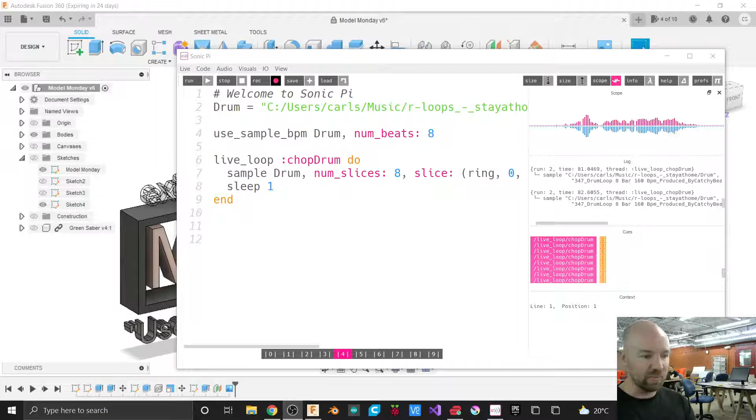Let's go ahead and get started. It is 7 o'clock here at the Milwaukee Makerspace on a Monday, so that means it's time for Model Monday. And we're going to model up a useless box; that's our project for the next couple weeks here.

Let me kind of fade out our Model Monday beat here. Let's kill that down. Alright, cool. So

like I said, useless box is our project for the next couple of weeks. And what does that mean? What is a useless box? Well, a useless box is something like this. I just did a basic Google search for useless box and came up with, basically, it's a box that has a switch on the top. And the entire purpose of the box is to turn itself off.

So as soon as you flip the switch, it turns on and turns the servo, and the servo flips the switch to turn itself off. So that's kind of the entire purpose of a useless box. But for us, it's an excuse to draw some stuff. So let's go ahead and do that.

I'm going to start a new project just by going up to this tab at the top where it says New Design, and I'm going to click on that New Design tab, and we've got a new document going on here. So I've got my part and a caliper, and what we're going to be modeling is a servo. So I'm actually going to come and steal that servo from you, Mike, if you don't mind, and I'll steal my caliper. Beautiful, thank you.

Alright, so the bonus of coming to join us in person for Model Monday is you get to grab the part that we're going to model a little bit early and grab some measurements from it. So I've got this servo here, and I've got my calipers, and I'm going to be shouting out some measurements as we start our sketch, for those of you joining us here, and for those of you joining us at home or via the recording after the fact. So

I'm going to think about this servo as kind of one sketch. I think I'm going to draw this mostly as a single sketch, a top-down view here. So I'm going to draw most of this servo thinking about it from this perspective. And I'll start by starting a new sketch. So I'm going to come up to the Create menu, and I'll choose Create Sketch.

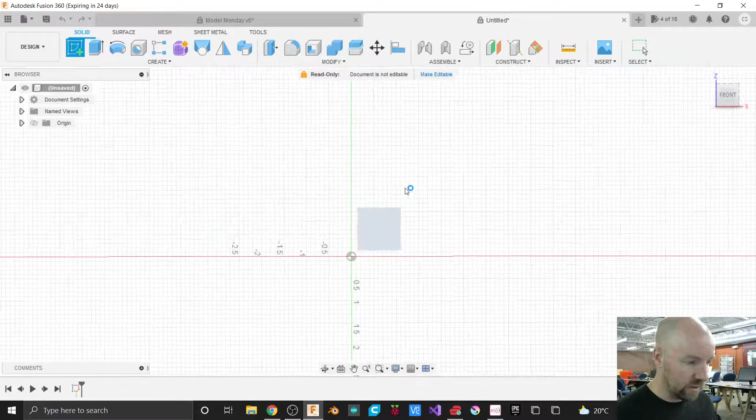And I'm going to create that sketch on my front plane. So I'm going to hover over that little yellow plane, and you can always navigate using the navigation cube so you can see it a little more easily if you're having a hard time selecting the right plane. And I'll click on that, and it'll spin me around to look straight down on it. And now we can start by making a rectangle.

I should mention, in general in this class, and it's probably a good thing to mention every time we start a new project, in the document settings over here in our browser on the left-hand side, we can spin down the document settings option, and you can see that I'm drawing in freedom units. My brain tends to think in freedom units.

If you want to draw in the international standard that's accepted by pretty much the rest of the world, feel free to do so. I support that decision. However, I'm going to draw in inches. You'll have to do that conversion in your brain hole. And if you're drawing in millimeters, you're smart enough to make that conversion on your own.

I'm certain of it. So I'm going to come up to the Create menu and come down to Rectangle. And I'm going to choose to make a 2-point rectangle, I think. I'm just looking at my part and seeing if there's a reason to make anything other than a 2-point rectangle. And I'm going to say no. So I'm going to grab my 2-point rectangle tool.

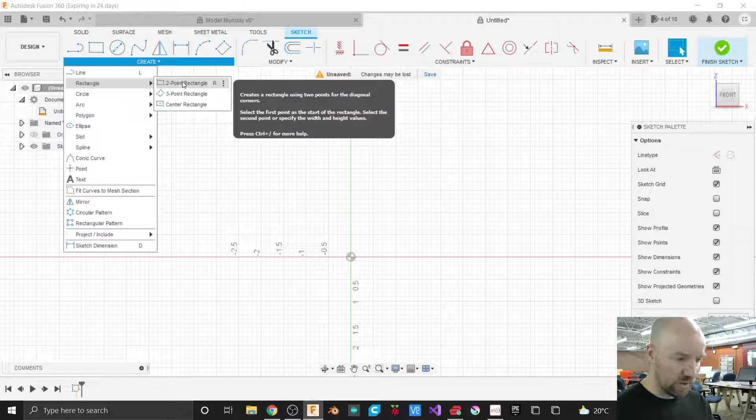And I'll click to place the beginning of my 2-point rectangle right there at the origin. And then I'm just going to move my mouse out. So it's a click and move, not a click and drag. I'm not holding my mouse button down while I do that.

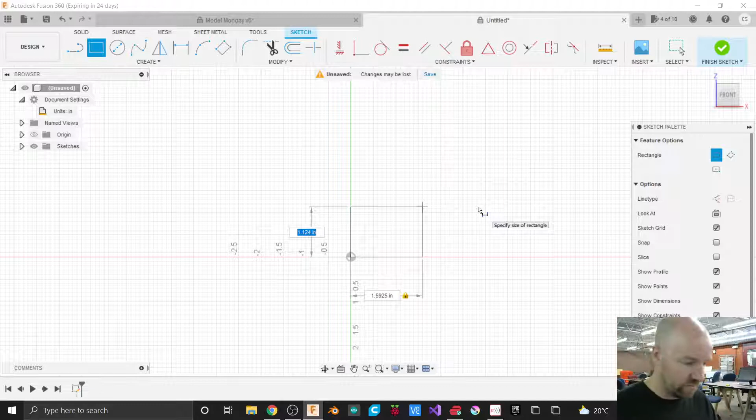And we are going to make this rectangle exactly 1.5925 inches. And then if I hit the tab key, the other measurement here, and I'm just kind of measuring up my servo here, it's 0.7835. So 0.7835. And I'll just kind of leave those measurements up there for a little bit, and I'll kind of zoom in here. I'll do this periodically throughout class today, I'll make a measurement, because we're going to be doing a fair amount of sketching, and I want to make sure you guys catch all these numbers.

So something you'll notice is we've got some rounding going on here. I feel like there's a way to change this. I think is it in properties? I feel like there's a way to change the default setting for decimals. And maybe that's not really important for this class, but now I'm just kind of curious. In our design, we're actually in our... There's not. There probably is a way to change that. I just don't know it right now, so we're going to move on.

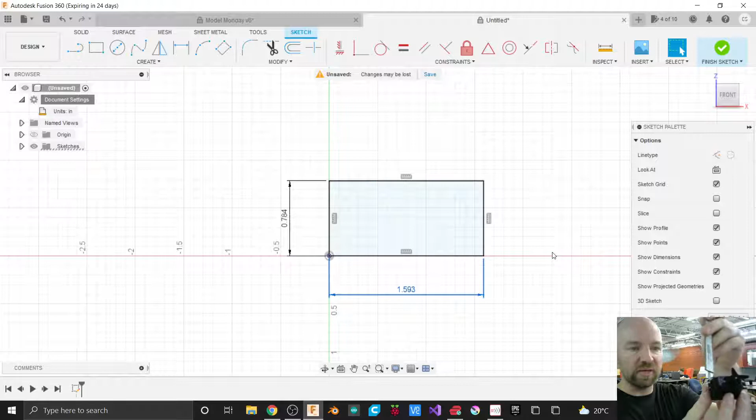Alright, so the next thing I'm going to think about drawing or modeling on this servo part here is there are wings, our mounting points here. Our mounting points are actually a different width than our servo body, and we can draw that on here. So I'm going to go ahead and grab my 2-point rectangle tool again. So I'm going to say create rectangle and then 2-point rectangle.

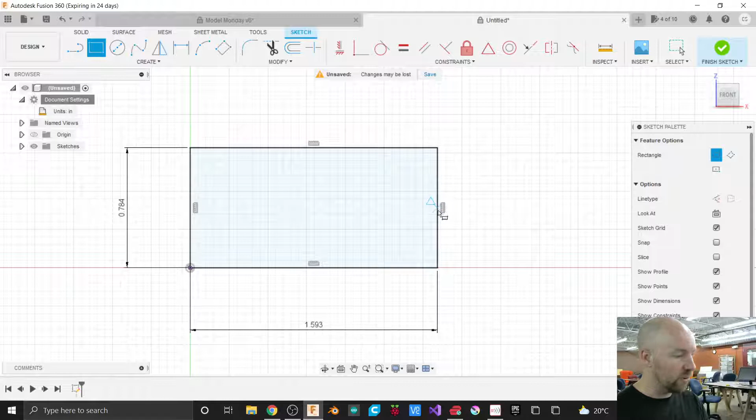For those of you trying to impress your friends at home with your keyboard shortcut skills, you can use the R key. Now, you notice if I hover over the middle of this line, I get that little blue triangle. And that blue triangle is telling me that I'm snapping to the midpoint of that line. And that is indeed what I want to do here. So I'm going to snap to the midpoint of this line, and then I'm going to move my mouse out here, and it's going to come out to a depth of, I can do it like this, and grab this measurement here of 0.265. That's going to be inches.

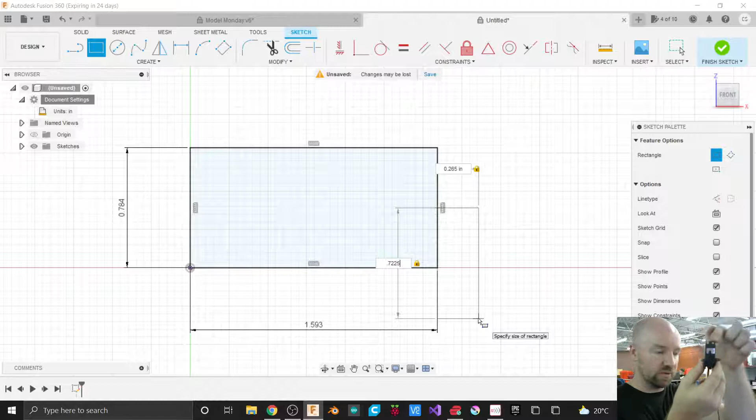And if I hit the tab key, now I'm only drawing from the midpoint out here because I know that this little thing is centered on my servo here. So I'm going to measure the width of the whole thing here, which is 0.7225. And then I'm going to do some math right here. So I measured this as being the entire width of this mounting point, but I'm actually just going to say divided by 2, and that's going to give me half of that because I'm drawing out from my center point out here.

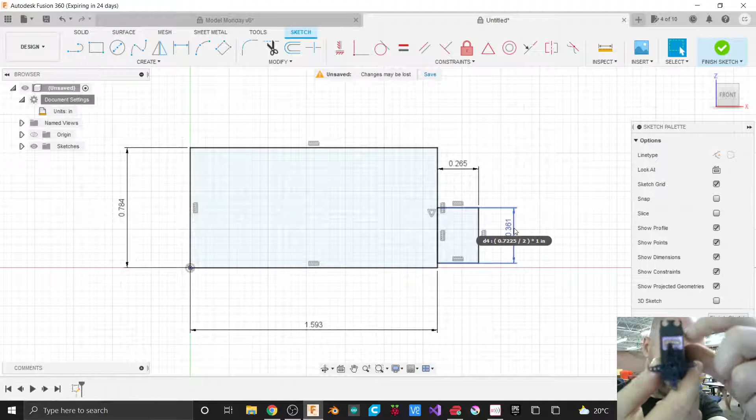That saves me from having to measure whatever this tiny amount of space is off here to the side. It's kind of difficult to see, but you can see the mount is not the full width of the servo. So that saved me from having to do that. And now, in order to get the other side of this, actually before I do that, let's go ahead and draw our circle in the middle of this thing.

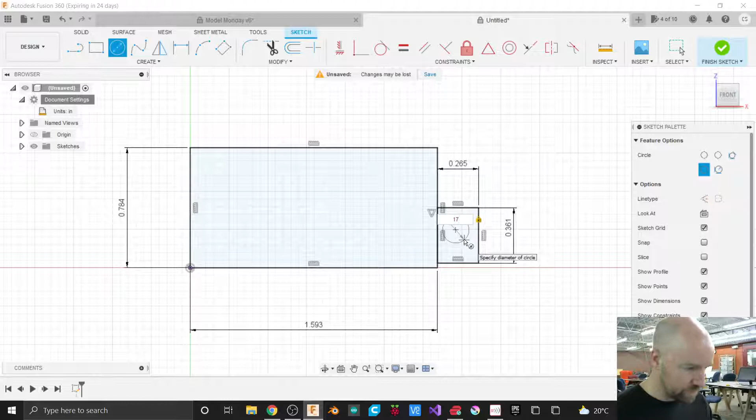So we are going to draw a circle here. So I'm going to grab my create menu and circle, and then I'm going to choose to make a center diameter circle. Now I'm not really placing this at any particular location right now. I'm just placing it in roughly the spot that I want to put it, and then we'll negotiate it into place after we have it drawn. Now the diameter of this circle is going to be 0.17 inches. And I'm going to go ahead and hit enter here.

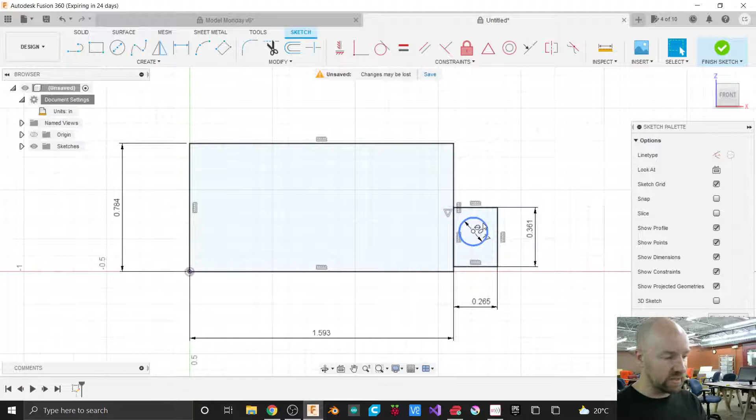And now I'm going to move it into place. So something you'll notice about my sketch so far is most of the sketch lines I have here are black. And that is because those sketch lines are fully constrained. So they're locked in position and in dimension. They're not going to move because they're locked in position with my origin, and they all have dimensions. Now this circle that we just placed is blue, and that's because the circle is not fully constrained. It's locked in dimension, here's my dimension of that circle right there, but it's not locked in position.

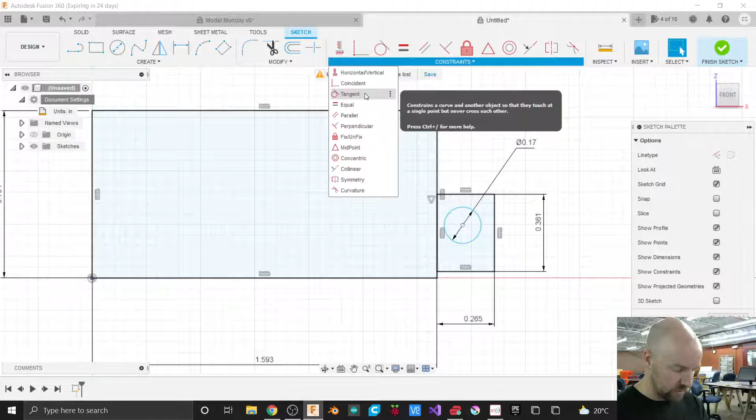And we're going to lock that in position now. So I'm going to grab from my constraints menu this tangent constraint. And I'm going to say, make this circle tangent to that line. And it's going to go ahead and lock it in position left and right.

So now this circle will always be tangent to this line here. And now I'm also going to give it a dimension from this other line here. So as you may know, in addition to giving dimensions to the sketches that we make, we can kind of add dimensions to relate objects to each other, if that makes sense.

So in my Create menu, I'm going to go ahead and scroll all the way to the bottom and choose this Sketch Dimension option. So I'll choose Create and then Sketch Dimension. And now I'm going to dimension the center of this circle and this line down here at the bottom, the edge of my mount for this servo here. And now I'm going to move this measurement out and just place it.

So now you can see our circle is now changed to black, so it's fully constrained now, only it's constrained to the wrong dimension. So we need to fix that. So if I measure, let's go ahead and zero this out again. If I measure the gap between my circle and my edge, it's 0.0835.

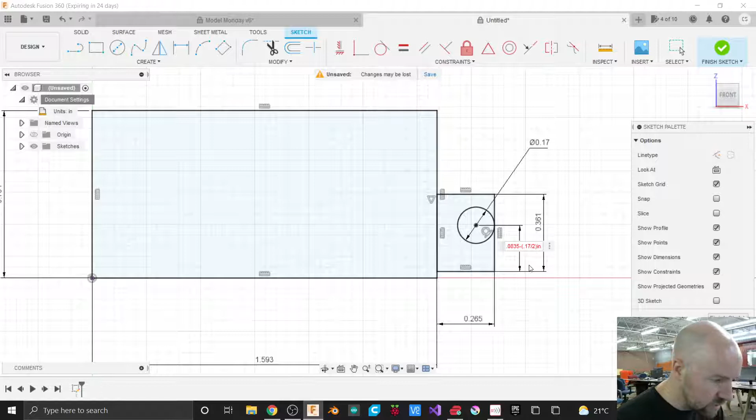And you can see I put that, oh, it doesn't like what I just typed there. Doesn't like that at all. Why won't it let me do that? Do I have to type in inches here? Alright, what is the part that it does not like? It likes that. Can I do minus 0.17? Nope. Can't subtract, apparently. I can add. Nope, can't add either. Why can't I add if I put a 0 before that? Well, it was letting me do math before. Why won't it let me do math now?

It's always fun when you can't do things that you feel like you should be doing.

Oh, okay, so minus 0. Well, I'm just going to go ahead and do that radius right now. 0.17 divided by 2. I don't have my phone on me. Does anybody have a calculator handy? What's the number? 0.17. 0.17 over 2? Yeah. 0.085. It really doesn't like to do that.

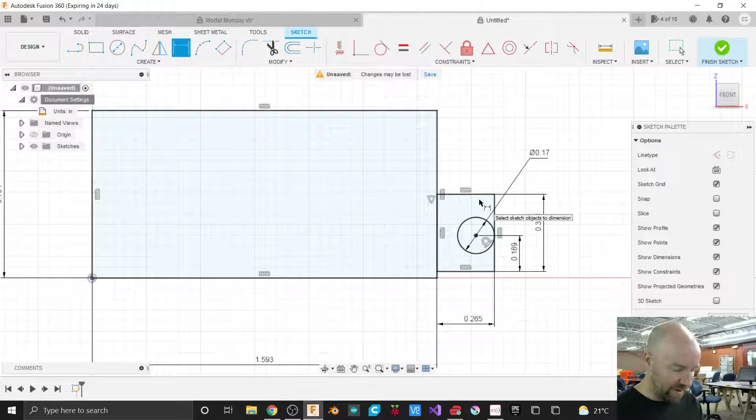And now the last thing we need to do here is to create the rest of our mounting holes. So we're going to have the same pattern over on this side, and we're going to have the same pattern over on this side, and we can do that by using the mirror command. So I don't need to redraw this whole bit of stuff here. We can use the mirror command in order to create all the rest of our shapes.

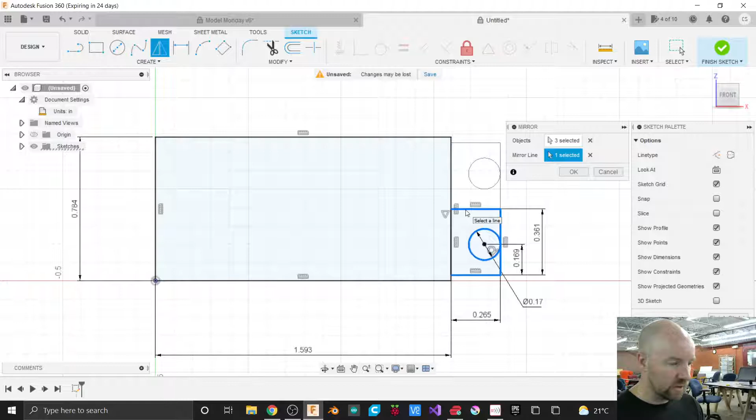So if I go ahead and click on create and then come down to mirror, now I can specify each one of the lines that I'm going to mirror. So I just need the circle and these two outer lines here that are part of our mount. And then the line that we're going to mirror this off of is this line right here, this other edge of our rectangle. And you can see it kind of ghosted in place there. And I can say OK.

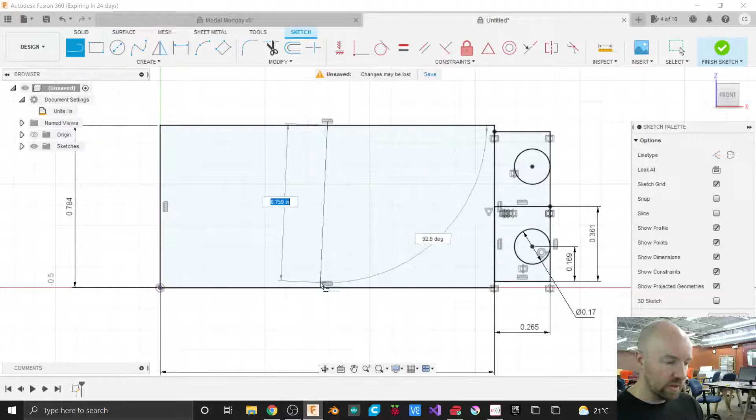Now I'm going to do the exact same thing, except I'm going to mirror all these things over to the other side. But if I'm going to do that, I need a center line to mirror across. And I can do that with our line tool using that midpoint option. So if I move towards the midpoint of this line with my cursor, you can see that little blue triangle pops up, and I'll just do the same thing over on this other side, and now we've got a line that divides our piece right in half here.

And I'm going to do one additional thing. So I can take this line, and notice if I hover over this part of my rectangle, it selects differently from this other part. So this is divided into two individual rectangles right now. But I don't want that to happen, because it's going to make me extra work later when I go to extrude this, so I can change the line type from this solid line. Over in my sketch palette, I can click on this construction line option here. And now this is just one solid shape with a construction line dividing it.

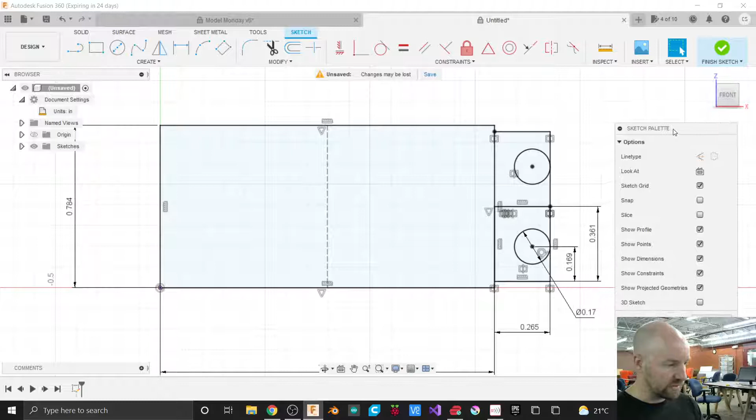Alright, so we can do that same method that we did just before. We can click on create and then come down to mirror.

Now I have a whole bunch of objects that I want to mirror. Actually, not really a whole bunch. I got several objects that I want to mirror. And there are a couple of ways to select objects in Fusion. So I can go through and click on these individually and go through and select all those options. Or there are select tools. So I've got my window selection checked here in my select menu up at the top. This is kind of my preferred method of selection.

And in order to select all of the sketch items that I wanted to select here, there are two ways that I can use this tool. So I can click and drag from top left to bottom right. And now you can see that my selection box is a blue line with an orange filling. And the way that that tool works is only the items that are fully inside of that selection box will be selected. So this line was not fully inside of that selection box. This line was not fully inside, neither were these circles here. So the only thing it picked were these lines up here.

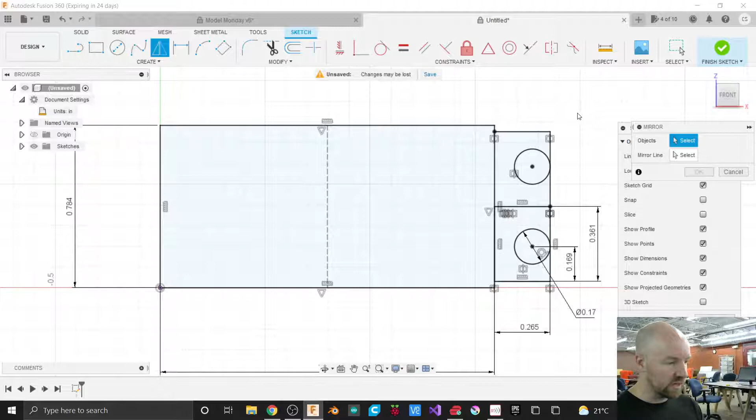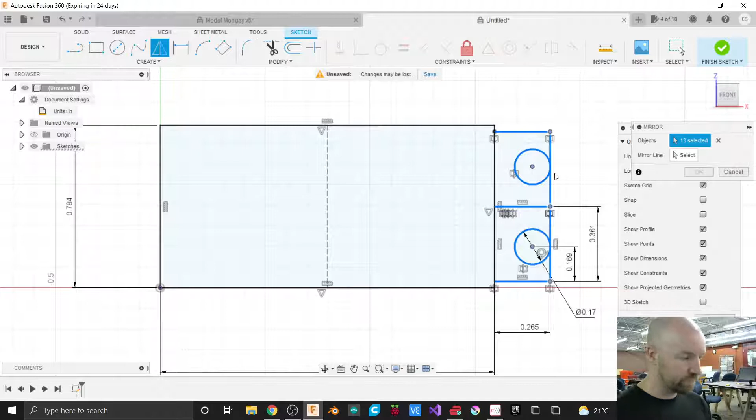If I use the tool the opposite way, if I click from top right and go to bottom left, you can see I got a yellow selection tool. And this yellow selection tool will select anything that it touches. So regardless if it's fully enclosed by my selection, if it's touched at all by my selection, it'll get selected. And that's a good method for me right here. I'm going to go ahead and choose my mirror line and say OK.

Alright, so now we're going to do a couple more things on this sketch. So I'd like to sketch the shaft of my servo on this sketch here. And we're going to locate the shaft of our servo very similarly to how we located our circles over here, our kind of mounting hole circles. So I'm going to come up to my Create menu, and I'm going to come down to Circle, and then Center Diameter Circle.

You know, before I do this, let me just kind of do a check-in. How are you guys doing? Are you with me? Are you following if you're choosing to follow? Do you want me to pause and see how you're doing? Or just take a little brief pause for the cause here and you can catch up? Dan, how you doing? I am going to do it by the YouTube video later because I got locked out of my Fusion account. Cool. Right on, alright. So we're just taking a little brief pause as we get a few people to catch up in class. I tend to go real fast. So there's another benefit of coming to class in person: if you need a little bit extra time, I will 100% give that to you. Or like Dan's going to do, he's just going to pause the video every 5 minutes. There you go. All right.

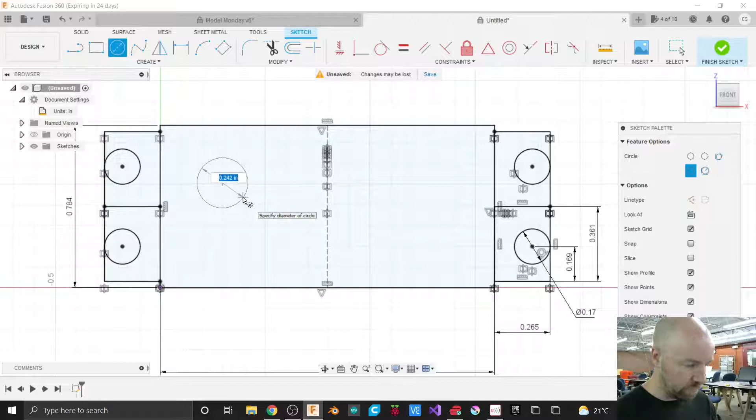While you're catching up, I'm going to measure this servo here. All right. You good? Goodish? Okay. So the shaft of this servo is 0.23. Yeah, 0.23. All right, so I'm going to go ahead and grab my circle tool. I'm purposefully making this in the definitely wrong position, because like I said, we're going to use constraints to force it into position. So I'm going to place this kind of off to the side here. I'm going to add my dimension that's 0.23 inches, and I'm going to click enter.

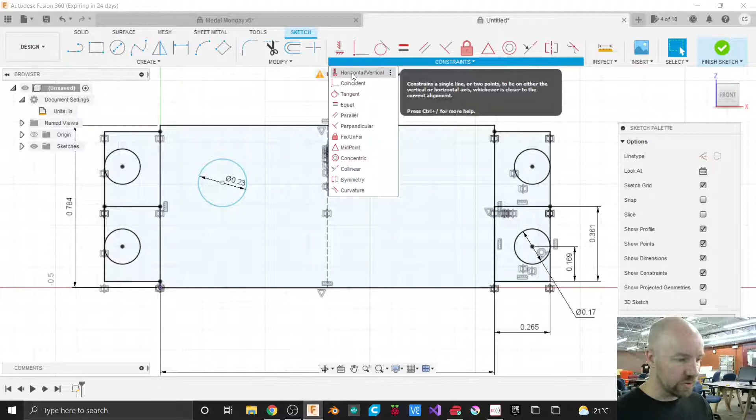Now the circle is definitely centered right to left on our drawing here. So I can constrain this right to left in our drawing using some existing lines that we have here. So there is a constraint called the horizontal vertical constraint. This is kind of a new thing that I'm doing, using these constraints more often, and this horizontal vertical constraint is nice. So what it says is if I choose the center of my circle and then I choose any one of these points here that is the end point of that center line that I drew initially that was part of this mounting bracket, so I can click on this point over here or one of these points over here, what will happen is this circle will always say, hey, I'm straight horizontal from that point.

So if I grab my move tool, I can only move it right or left, even though I'm moving this up and down, because it's got a constraint forcing it to be directly horizontal from this point. So now it's constrained in one direction.

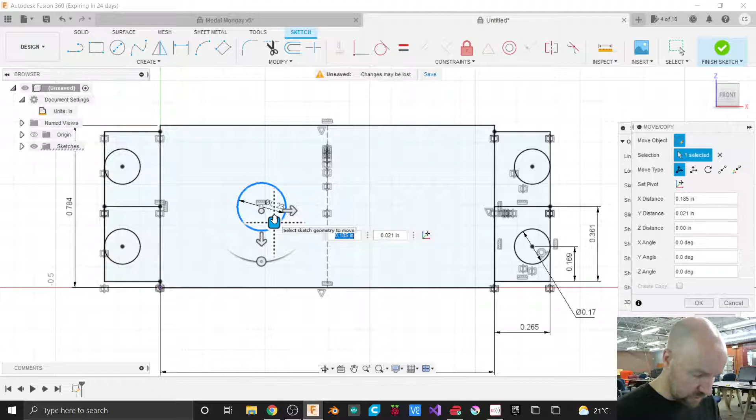Now I just need to constrain it in the other direction, and I'm going to do that in a little bit because we've got a couple other concentric circles that we're going to draw around this, and it looks like the final concentric circle is tangent to this line up here.

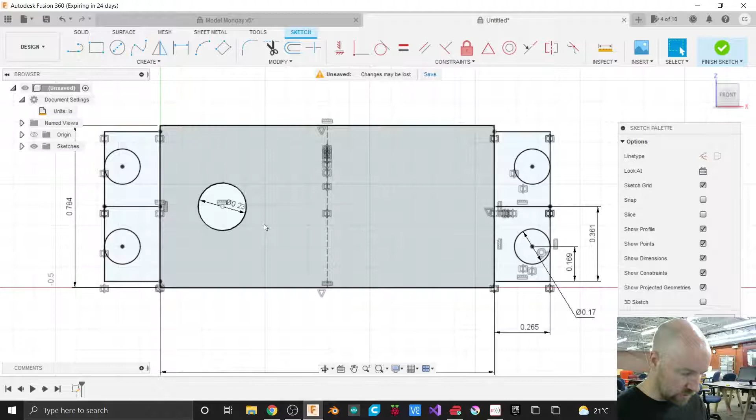So I'm going to wait to constrain that until I have my other circles drawn. Alright, so now I'm going to draw my 3 other circles. I'll draw one circle that is 0.4225, so I'll grab my circle tool. 0.4225.

Now I will say that this is way overkill for what you need to make it. If you're going to model this servo, the amount of detail you need to have in order to create something functional, or that is accurate enough that you could put it in a drawing or an assembly and be able to pull useful information from it, is less than what we'll have going on here. But it's fun to try to make things as super accurate as possible.

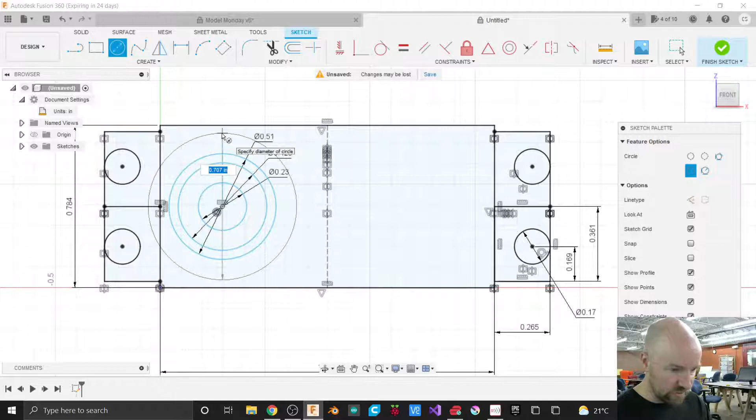So that's kind of the method that we're using here. So this final circle is going to be 0.78. I feel like this was 0.7825.

Alright, so I'm going to take a little pause here because I drew a lot of circles, and each one of them has a measurement that I've kind of got concentrically pulled out around the outside here. So we've got 4 total circles and a center shaft circle. I've kind of got them arrayed here. This is really useful to be able to reposition these measurements wherever you need them, so they can make you have a nice clean looking drawing.

So I'll just take some time to clean up my drawing and really make it easy to read here. That's always important. Somebody once told me that when you have a drawing like this, you're supposed to have all the measurements only on 2 sides. I don't know if anybody else prescribes to that suggestion. I'm not following it here, but if you feel there's a reason to do that, go ahead and yell at me in the comments.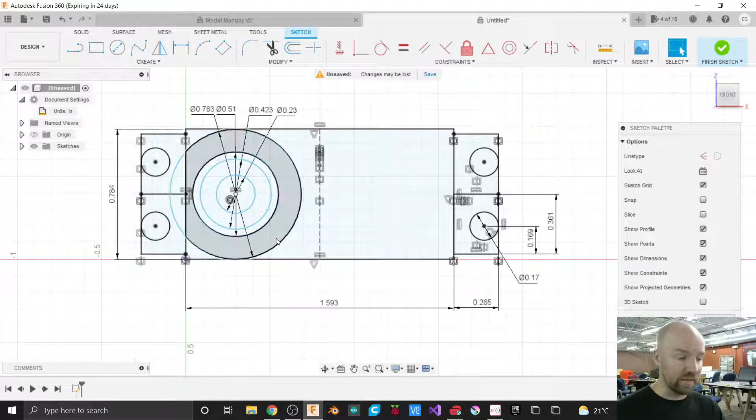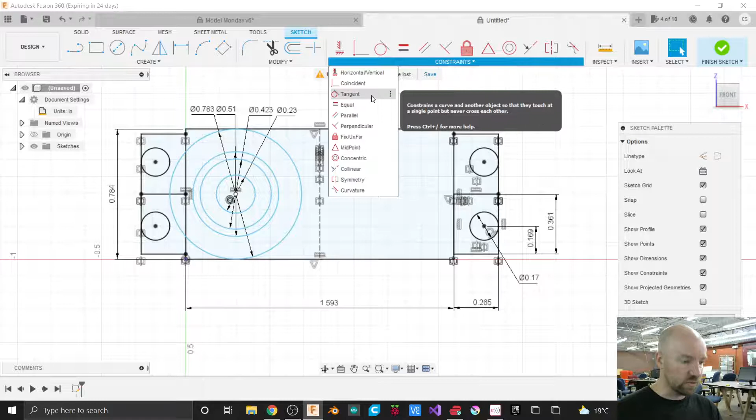Alright, so now we've got a whole bunch of circles drawn here, and now we're finally going to place these in position. So we've got them constrained in this Z direction, in the up and down direction. Now we're going to constrain them in the final direction, because this circle is going to be tangent to this line here. So if I grab my tangent constraint from the constraints menu, and I choose this outer circle, and then I choose our line, now it's going to move them all into position.

Because all of these circles share a center point constraint. They all have that because I chose to make the start of my circle at the center of the last one. They're all kind of holding on to each other in that way. Now the last thing we want to do is create the last little bit of this shape here. This is 0.7 even.

So I'm going to grab my rectangle tool one more time, and I'm going to place the first point of my 2-point rectangle at the center point of all those circles, and make this out in this direction. It is going to be 0.93 by 0.7 divided by 2, because I'm choosing to do this halfway again, since I'm going to mirror this over the other side.

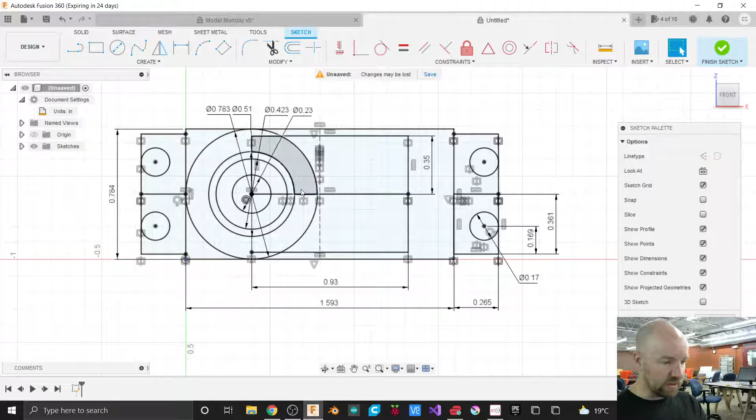Alright, so I'm going to do a couple of things here that I don't do all the time, and I'll explain why after I do them. I've got a lot of lines that are kind of overlapping here, and I don't really want that, so I'm going to use the trim tool.

The trim tool is in the modify section, so if I click on modify and come down to trim, this tool will allow us to cut off the edges of the parts of the line that we don't need. This last concentric circle and this rectangle are kind of all part of the same shape, so I can use the trim tool to cut away the parts of this line, this circle, that I don't need. The trim tool works by looking for intersecting lines and cutting away the bits in between them.

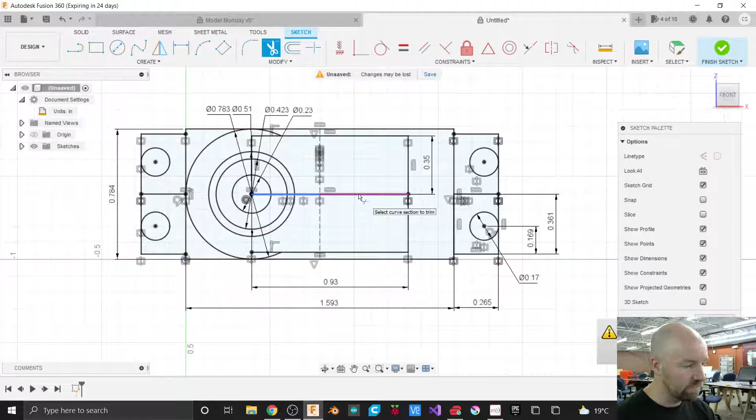So I can click on that part of the circle there and cut it away, and that part too. I can do that with this center line here, although I don't know how that'll affect me later, so I'm trimming away all of the individual parts of that center line to get rid of them. I'm also going to trim away these parts of the line or rectangle that extend beyond the circle here - that line, and that line, and that line, and that line, and that line.

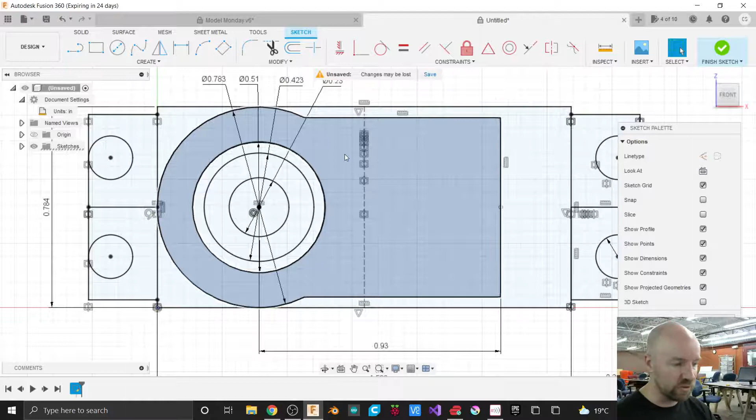Now the reason I've done this is all of this I'm going to extrude as one piece, and it just makes it easier for me to select one object to extrude, or one enclosed area, than it is to extrude out and click on all the little individual pieces. The other reason is it just looks cleaner, right?

Now Fusion is currently swearing at me - all those lines are red. The reason they're red is because I deleted a lot of valuable geometry, frankly. I deleted this center line here, and that center line was my mirror line, so the method by which this line and this line appear over on this side no longer exists. You can also see I lost my dimensions because I cut away that center line there. So if I want to change dimensions here on this object, it will not behave in predictable ways when I go and change those dimensions.

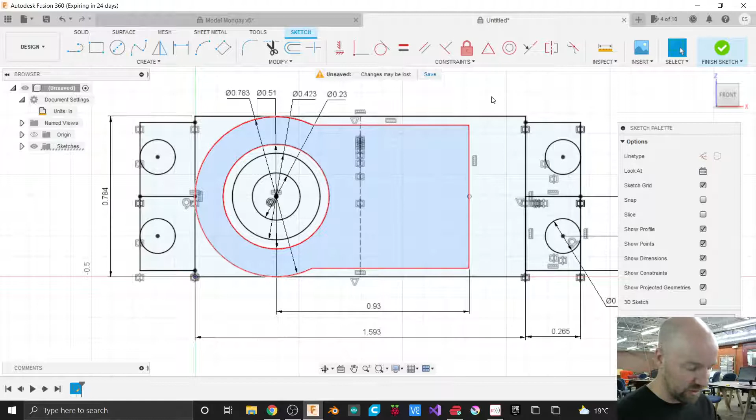So I don't often advocate the use of the trim tool for things that you're going to need to change, or may need to change, but these measurements are pretty much set in stone. We've got our part right here, and I'm confident that I measured it properly, so we're just going to roll with it, and I get to show you how to use a tool that we don't use a whole lot.

Alright, now that is pretty much it for this sketch. I'm just kind of looking at my part, and almost everything is modeled, or almost everything is drawn, on this single sketch, which is convenient for us. So I'm going to go ahead and click on Finish Sketch here.

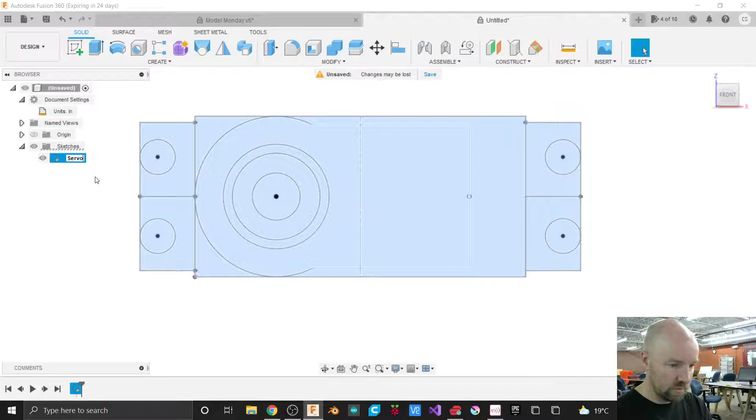Now I've got a Sketches folder over here in my browser, and I can go ahead and name this. This is my servo - servo with an R. Actually, I could go ahead and call it servo body. It's not really a body though, so bodies are a whole different thing. I'm just going to call it servo.

Alright, now we can start extruding the parts of our servo here. We've got everything drawn in one sketch, so we're going to need to make use of an offset tool as we extrude. Maybe we won't actually. Alright, so I'm going to start by extruding kind of the main body of our servo. I'm going to spin this a little bit more into a three-dimensional view.

How you doing, Mike? Do you have a sketch? Yes. Sweet.

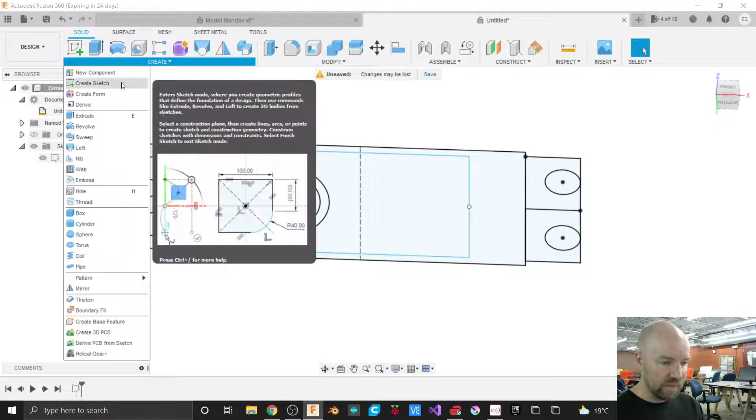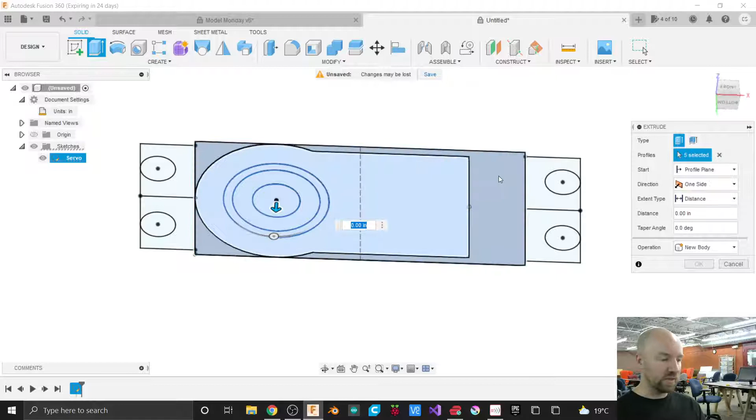Alright, so I'm going to go ahead and click on Create, and then I'll choose Extrude here. I'm going to extrude all of the parts of this servo that are inside of my main body here. So everything inside of this big rectangle that we drew when we first started, that's all going to get extruded.

And it's going to get extruded a distance of 1.44. So I'm going to go downwards here, kind of away from my sketch. I guess this is technically backwards because I drew on the front, so I'm moving towards the back.

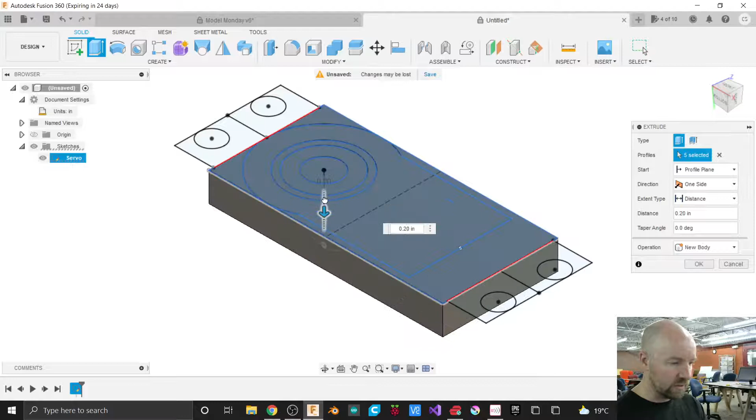I can see that it's a positive number when I'm moving in that direction, and if I move in this direction, it's a negative number. I'm going to extrude some things in that other direction, so I want to make sure I type in the right positive negative value here. This is going to be 1.44, and for me it's a positive number, but for you it might be different. Fusion is a mystery to me about negative and positive numbers. Sometimes I think it should obviously be negative, like here I'm going towards the back, so I don't know why that should be a positive number, but it is. So positive 1.44, I'm going to click Enter.

Now we've got a bodies folder here, and this bodies folder has a body in it. I'm going to go ahead and name that body my servo body. And now I can keep extruding things.

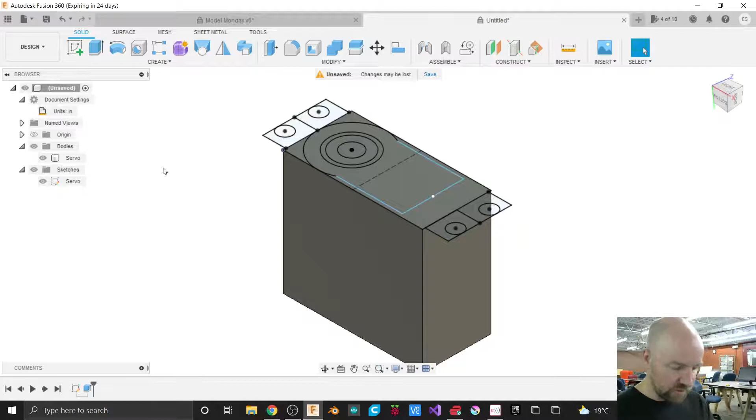So from my servo, I'm going to extrude the outermost ring of our shape here. This shape right here is going to be extruded up and away from the body of our servo.

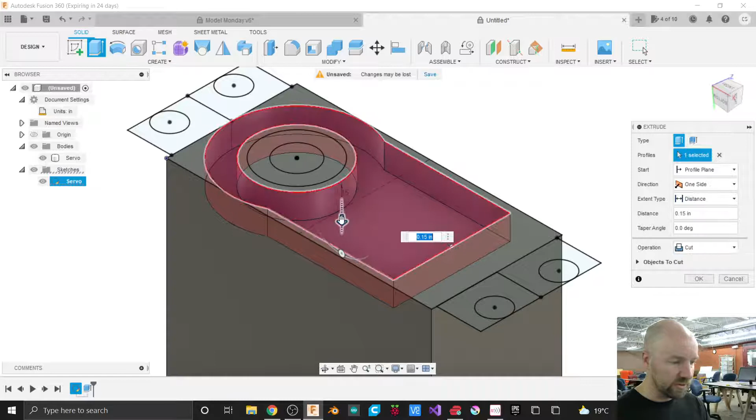0.095, no, 0.1. And now this is going to be a negative number, so it's negative 0.1. We'll bring it up, and that creates the first little step up in our servo here. Now the operation I'm choosing is indeed going to be join. You can see that if we move it down, the operation defaults to cut, and that would be cutting away from this shape. So it's interesting to know that you can cut away from a three-dimensional shape using a sketch. But join is what I want here, so I'll choose OK.

Now I'm going to extrude the next segment of our servo, of our little concentric rings there. So I'm going to click on my extrude command, and then the next full circle there is going to come up a distance of - just going to eyeball that because we got to get close-ish for government work. It is 0.1155, and again for some reason for me this is a negative number. And I'm going to say OK.

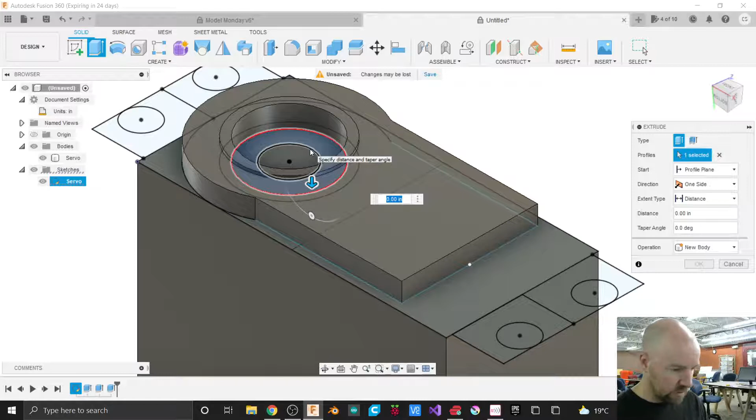Now lastly - actually not lastly - I'm going to extrude the next little segment of our circle, which is going to be 0.13, negative 0.13. And this is also going to be a join, so we're joining those together, and I'll say OK.

Now we need to extrude the shaft. Shaft!

Gotta have that theme song play. When my dad's not in class, I don't have him to sing the song for me, or say things like, 'You damn right.'

Alright, so the last extrusion is going to be the very inner circle there, and this is our shaft. So our shaft is 0.31, negative 0.31 for me.

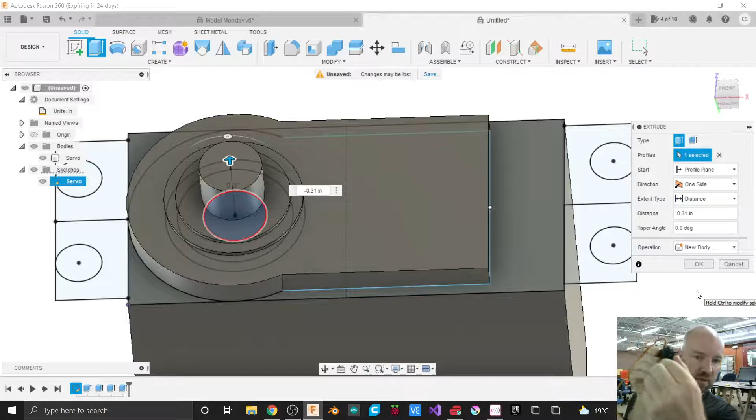I'm actually going to choose to make this a new body. Eventually, I think I'm going to make a joint out of this, and if I want to make this spin in the model, make a joint in the model where it can spin like my servo can spin here. So I need to make it a new body in order to do that. I'm going to choose this new body command and say OK. And then that means I'll have one more additional body over here that I can call servo shaft.

Now the last items that we need to extrude from our servo sketch here are our mounting holes. And we can extrude those from this sketch, even though the plate for our mounting holes starts kind of below our sketch level. So you can imagine like this top surface here, that's where our sketch exists. But we're going to extrude down here by using an offset.

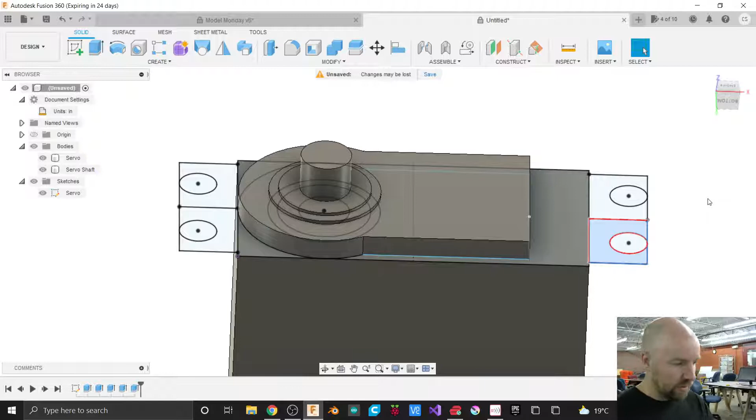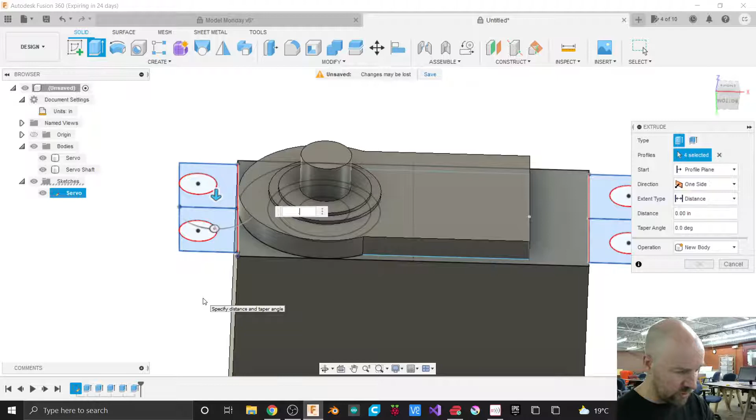So if I go ahead and choose my extrude tool, and then I pick each one of these little mounting brackets here, now the thickness of this mounting bracket is 0.0955, which is going to be positive for me, 0.0955. Yep, so downward into my shape is where I want to go with that.

Now the mounting bracket is not right at the top surface of our servo here, so it's not right up at this level. It's down here, an offset amount - down there a distance of 0.229 - and we can extrude from that distance by changing the start plane here. So normally when we extrude something, it's from the surface that it's drawn on. Our sketch is drawn on a particular surface here in space, and we extrude from that. But right now, what we really want to do is extrude from an offset amount from our drawing surface.

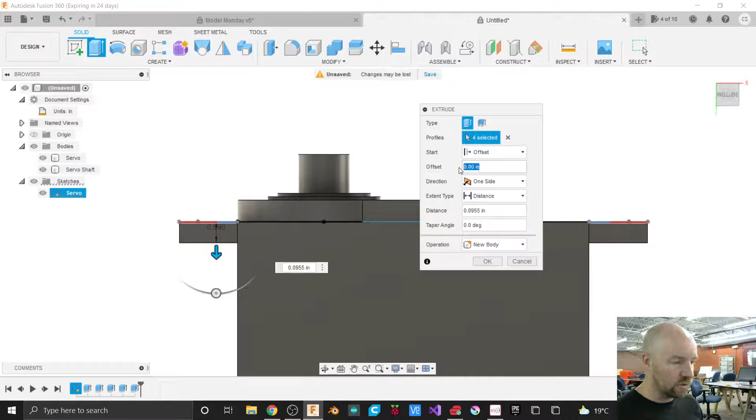So if I make that offset amount 0.229, and for me, again, this is going to be a positive number. For you, it might be different. It could be a negative number depending on how Fusion is orienting your drawing. So just for example, if I change this to a negative number, you can see that it's clearly kind of in the wrong position here.

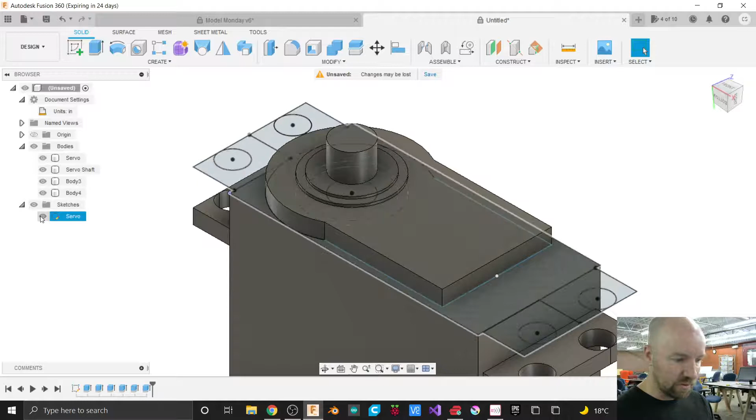So that's your clue that you need to multiply by -1, or just change your negative to a positive. Change those negatives to positives and turn that frown upside down, and then you'll be having a good drawing, and you can hide your servo sketch, and there is the beginnings of a pretty sweet looking servo, if I do say so myself.

Now the last thing I want to do here is to model the port where our servo cord comes out here. So we've got to have room for this in whatever enclosure we build around our servo. You want to make sure you account for this little dangler there. And I'm going to do that on the top side of our servo. So I'm going to spin around to this side here.

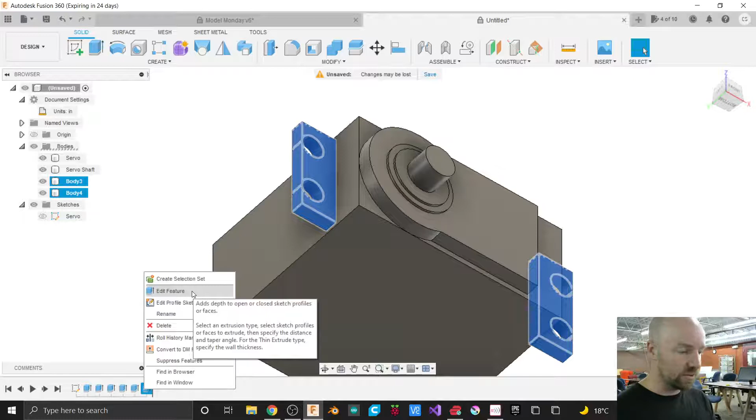Oh, you know what? This extrude, I can see I've got some extra bodies over here. And I don't want that, because it changed from join to new body accidentally. So if this ever happens to you, down here in our timeline, we can right click and say edit feature. It's interesting that it doesn't have that one selected.

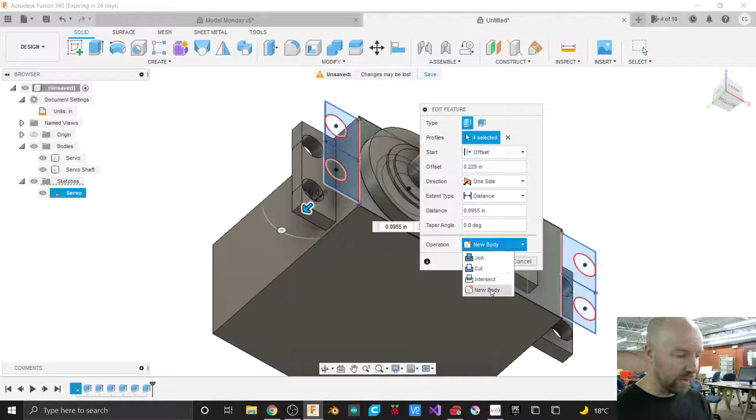Alright, so now instead of new body for an operation, I'm going to go ahead and say join, because I want this all to be one big, happy, joined together family. Alright, so there's our servo body, and like I said, we're just going to draw this little port up here where our cord comes out, just so we have that located for our drawing.

So I'm going to grab my Create Sketch tool here, so I'll click on this Create Sketch icon in my Create menu, and then instead of specifying one of these 3 drawing surfaces, you can draw on any flat surface. So this surface here, which is the shaft side top of our servo, I'm going to call that, is where I'm going to draw this little port. So I click on that.

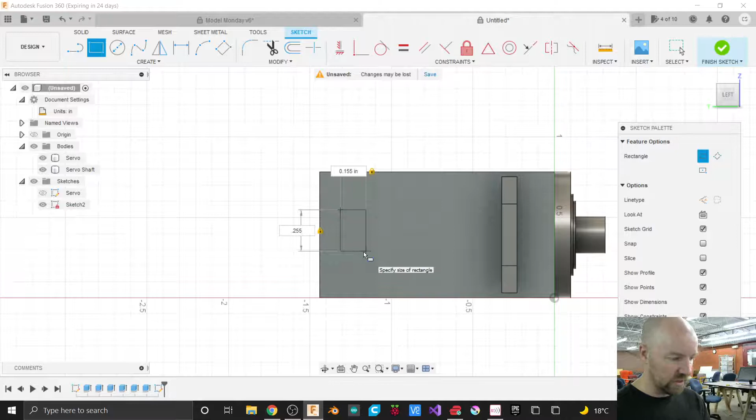Now we're going to draw a rectangle. So if I click on Create, and then Rectangle, and then 2-point rectangle, our rectangle is going to be 0.155 by 0.255. So 0.155, and then I'll hit the tab key. 0.255 is the dimensions of our rectangle. And we just need to place that in space here.

So again, it looks to me like it's centered on our object here. Only I believe that we don't really have a midpoint on either one of these to choose. So I'd like to use that same horizontal vertical constraint that I used before, right? The same way I marked the center for placing this circle here, I'd like to use that same method on the side, but I don't really have a midpoint or a point to click on. We really need to have points here. So we can add them.

In the Create menu, there is a very underutilized option here in the drawings that just says point. So instead of a line or an arc or a circle or whatever, we're just going to make a single point. And if I place that single point on the midpoint of this line, you can see I've got a blue triangle that says I'm snapping to the midpoint of this line. And I can place that point right there.

And I can do that same thing over on the edge of my other surface here. I've got that little blue triangle, so I'm snapping to that midpoint, and I can click and place that point. So now I've got 2 points that are constrained on their individual rectangles.

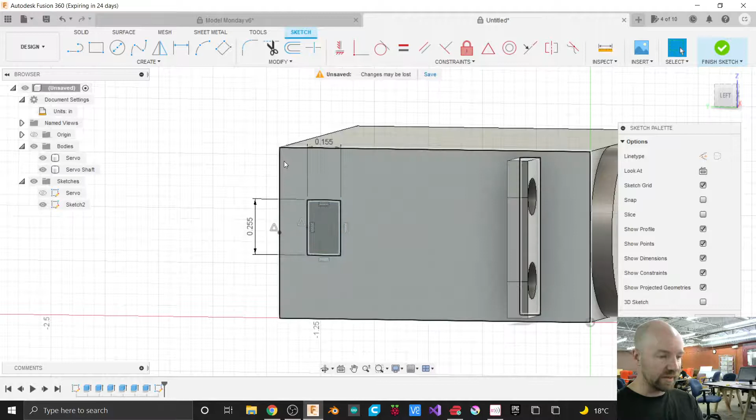So now when I choose that horizontal vertical constraint, and I choose the first point that's on my rectangle here, I'll mention, this rectangle I want to move. So as a general rule, at least most of the time in Fusion, I can't think of a time when it's other than this, the object that you want to do the moving, you choose that first. So I want to move this object to that point.

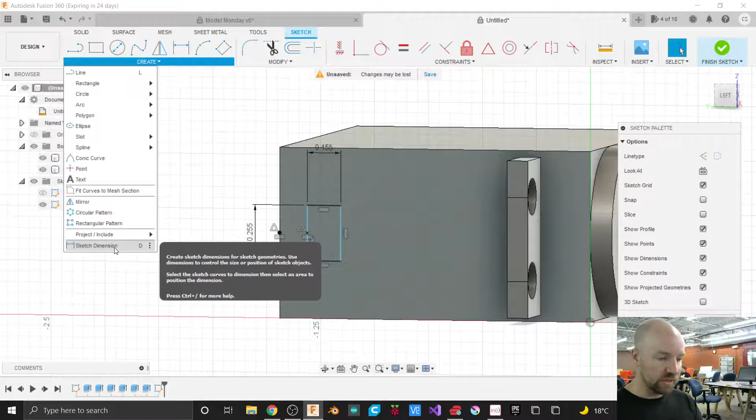So now you can see it's constrained in one direction, and I can constrain it in the other direction by adding a dimension constraint, just like we did that very first time. So if I click on the Create menu, and then I choose this Sketch Dimension option here, I can click on the bottom of my line, and I can click on the big huge line here that represents the bottom of my servo, and I can place that dimension, and now I can actually set that dimension as being 0.15.

There we go. That is all we need to do on that sketch. So I'm going to go ahead and click Finish Sketch here. And I'm going to name this sketch. This sketch is my cord. Good enough. Anything is better than sketch 2.

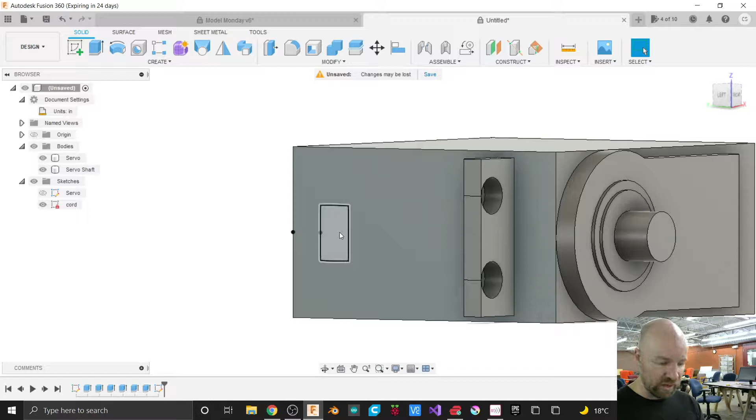And now I can extrude a little piece from that. Extrude, I'm just going to choose that little piece right there and extrude it out. This is coming out a distance of 0.2. Not super crucial, but we just want to know where that cord comes out just for reference so we don't accidentally not make room for our cord in our final piece. So this is our sketch here. This is really the crux of our servo.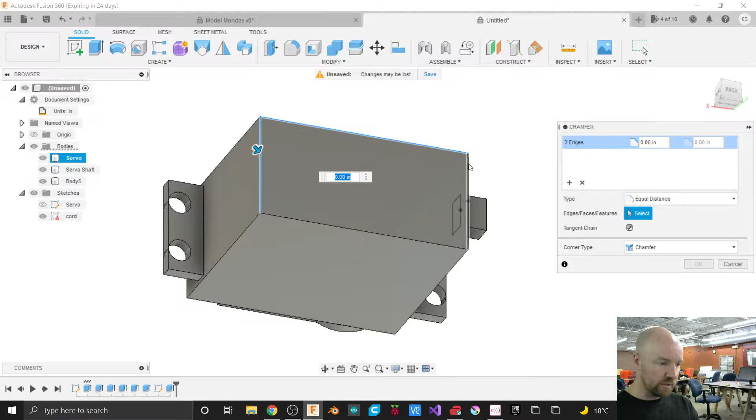Now I'll do just a little bit of cleanup here. So the servo I'm looking at has a lot of soft edges, and the bottom of this servo is actually filleted. Not filleted, it's chamfered. So in the modify menu, if I come over here to this chamfer option, I can choose each one. Could you just choose the bottom edge and that would select all of them? You sure could. So I could choose this bottom face here, and it's going to go ahead and pick every edge that's on that face.

And gosh, I don't even know how to measure a chamfer. This one looks like it's 0.09. Yeah, that. I don't know how that's measured. I wonder if that chamfer goes like 0.09 in X and Y, or if it's a diagonal measurement. But at any rate, this is just kind of a cosmetic thing for us. It looks like it's less than that. I'm gonna go 0.05. It doesn't look like much of a chamfer on this at all. And I'll say OK.

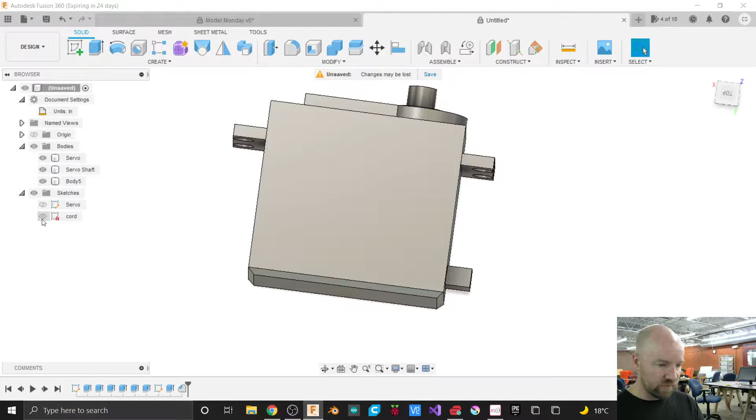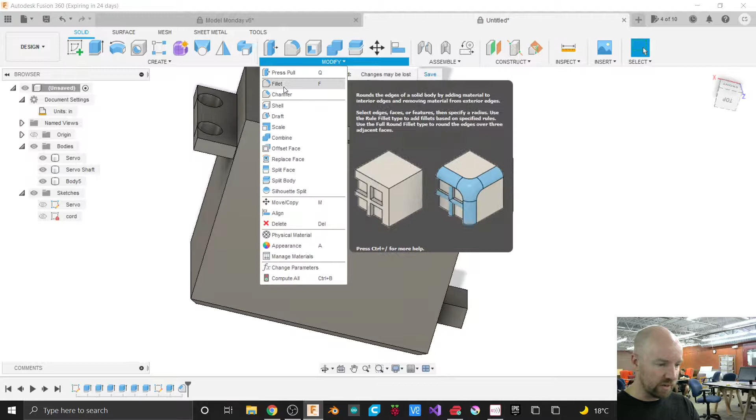Now our servo is full of hard edges, and there are very few hard edges on this thing. So I'm going to add a couple of fillets. The first thing I'm going to fillet is these edges over here, like that edge on all the sides here. So I'm going to click on Modify and then choose Fillet. And I'm going to pick each one of these little edges here that are kind of the edges of my mounting hole, and just give them a decent little fillet there.

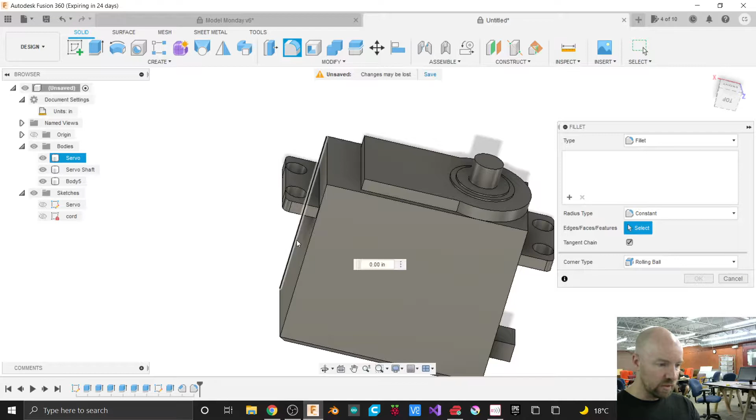And then the last things that I'm gonna fillet are, looks like all of the edges around this main part of the body here are filleted, all the ones that aren't chamfered at least. So in the modify menu here again, I'm going to choose fillet, and I'm going to pick each one of these lines. Now you can sometimes get into a little bit of trouble when you pick too many things to fillet at once. Sometimes Fusion will say, nope, can't do it, does not compute. And you just have to do things one at a time and figure out which specific fillet is giving you problems.

I'm going to make this a real small fillet. It's just a real soft little edge. Again, this is super unnecessary, but if we're trying to make things look as cool as we possibly can, and we definitely are, then adding some real small fillets does that.

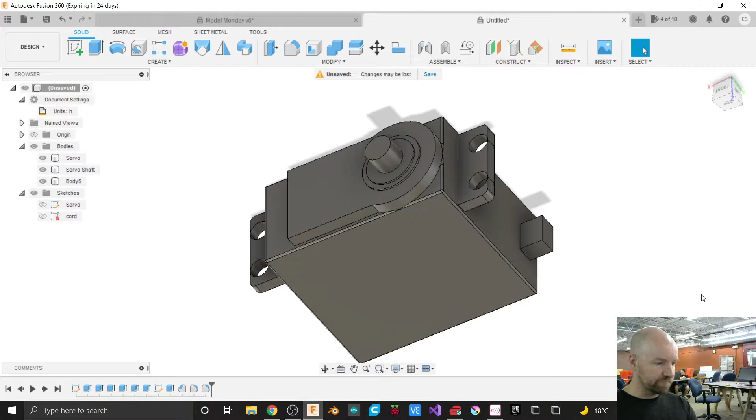And then as a bonus, just because we got a couple more minutes in class, how you doing on fillets, Mike? You got a drawing that you're happy with? Yeah. Sweet.

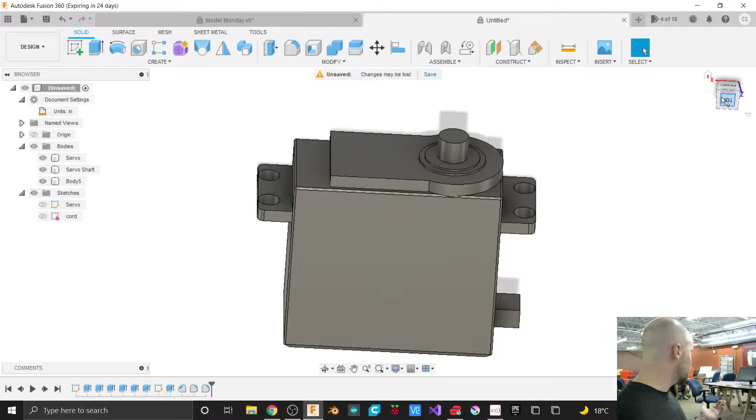So the last thing that I want to mention is right now our servo is just all one color. It looks super boring. Sometimes it's useful to have things that look like they're made of different materials, right? Our shaft is not going to be made of the same material as our servo body. And we can add some materials to our object here. So if I click on this modify menu and come down to appearance,

I should mention that there's two ways to do this. There's this appearance option, which is the option that I often choose, and then there's this physical material. Both of these will achieve the same visual result. However, maybe we should do physical material because this maybe is a better way to do it.

Physical material also includes things about its weight and its machining properties. So if you're going to machine something, if you've added a physical material to it, the machining part of Fusion 360 goes, hey, this is made of aluminum, so I'm going to find you a feed and a speed rate that's good for aluminum. It also, we could do things in Fusion where we do

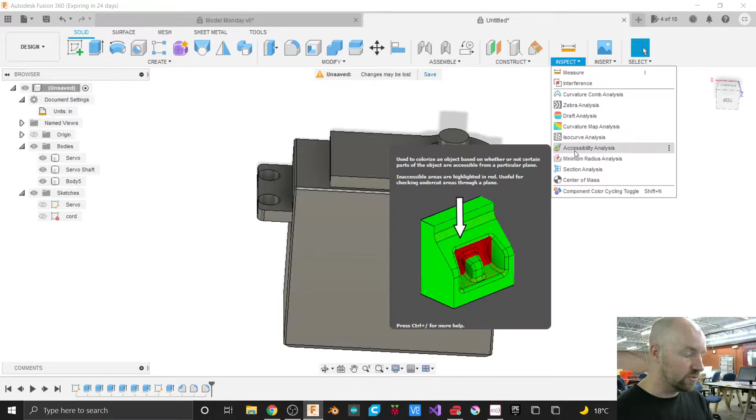centers of mass, and maybe that changes for various materials. So you can figure out the weight of an object. So if you've drawn something and you want to know how much it's going to weigh, if you give it a physical material, it'll tell you how much it's going to weigh, if it's made of lead or if it's made of ABS. And those two will obviously be different.

So if I choose this physical material option here, this window looks exactly like the appearance window does, except it says physical material at the top. So we've got a whole bunch of materials here, and if I come down to this plastic folder and I spin that down and I choose this ABS plastic, which is, I'm sure, what this servo body is actually made of. If I choose this ABS plastic and I click and drag, I drag it either out on top of my body here in the drawing view, or I can drag it on top of my body in my bodies folder here.

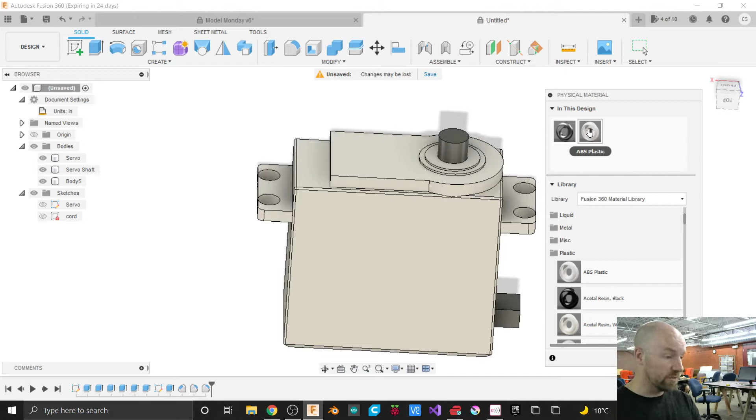So if I double click on the material, this ABS plastic material in my physical material folder, oh gosh, I guess I gotta click on advanced. Yeah, so this is a little bit different than in the appearance window. So if I double click on that and then I choose advanced, and then I can pick the appearance tab, then do I have to double click on that? Wow, this is a lot different. We might just leave it white.

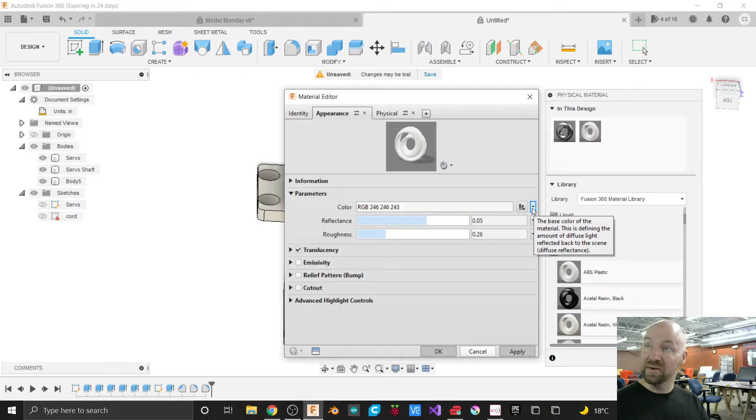Because normally, oh gosh, you have to pick this RGB thing. Wow. Alright. So here I've got an RGB value. Can I pick on edit color? That's what we want to do. Alright, so in this parameters window here, sorry, this is more complicated than I thought it was going to be, Mike. We're going to click on this little arrow here and then choose edit color.

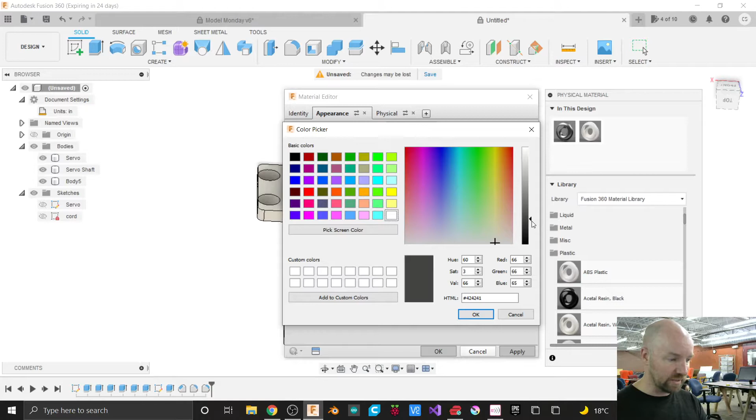And now we can go ahead and take our little slider bar and move it down into the black area. I find that you probably don't want to go full black because everything just kind of disappears. If we go mostly black, like really deep charcoal, that'll be good. And then you can say OK, and then OK. And now we've got a nice black servo body.

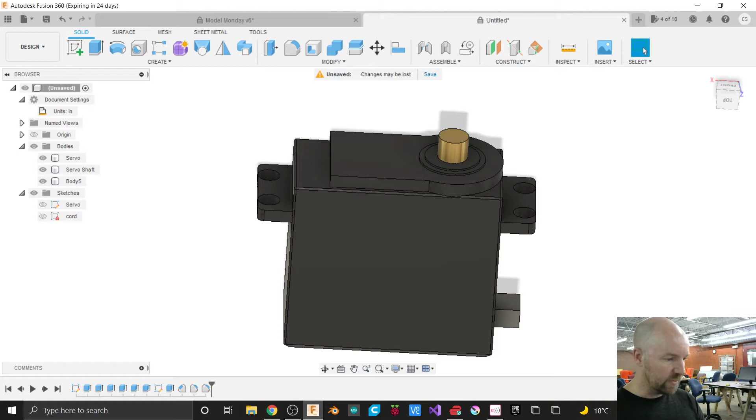And we can do one last thing, because the shaft of our servo, I'm sure, is brass. So if we click on this metal here and scroll down past all the aluminiums, or aluminum if you prefer, you can find this brass option, and I'll click and drag this brass option on top of our servo shaft. And then that's it. I'm going to say close. We've got our servo body here modeled up. The beginnings of our useless box.

I'm going to go ahead and save this. And I'm going to make a new project for this. So this is our servo. And I'm going to go ahead and make a new project. This is our useless box. And inside of that useless box project, I'm going to go ahead and save this servo. And I'll just say save.

Cool. So that's it for Model Monday today. Next week maybe we'll make our switch. So we're going to need a switch that's part of this. And if we have time, we might try to make our box next week too.

And then what'll be the fun part of this class, and the interesting part I think, is when we come and add joints, because I want to be able to make, oh boy, I clicked on a thing. I want to be able to show you how to make things move here in Fusion finally. So we'll add some joints that'll kind of let us figure out how this box is going to turn itself off. And you may be able to find a unique way to turn off your useless box by using the joints here in Fusion 360. So next week we'll do switch and box. We'll make the switch first, and then a box to hold all the stuff.

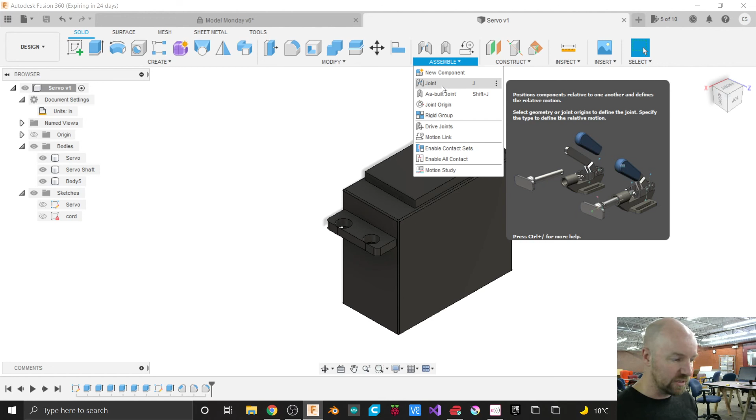Oh, thank you. All right, I just gotta figure out how to stop the recording now.